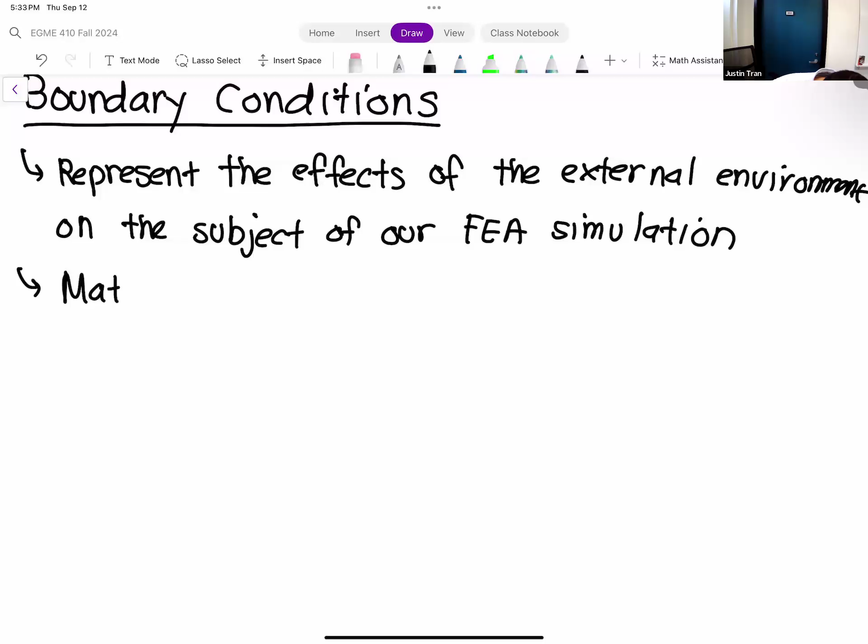Boundary conditions also play a very important mathematical role. Because if you recall, FEA, or finite elements in general, is just a very sophisticated computational way of solving differential equations. In order to get a complete solution to a differential equation, you need to apply boundary conditions on what we call the general solution.

And this is not a new occurrence—you've already used boundary conditions in your previous math classes in 308. So let's do a very quick example to remind you what this looks like. Let's consider a very simple 1D differential equation.

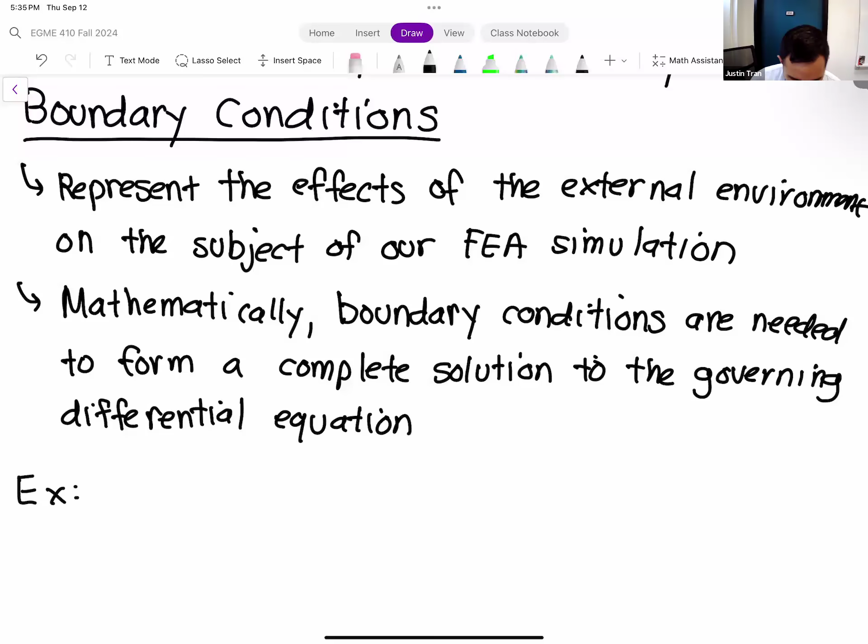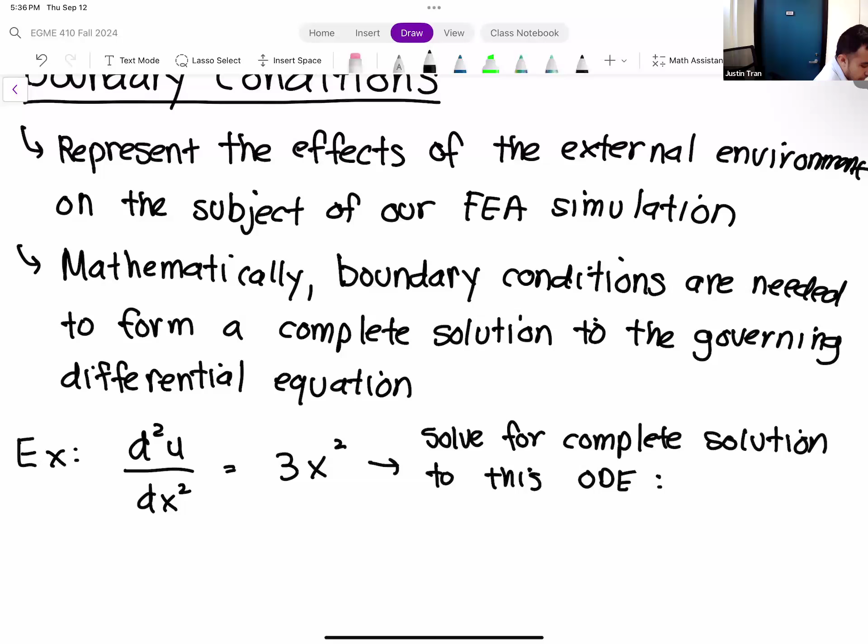Let's consider the differential equation d squared u / dx squared equals 3x squared. We're interested in solving for the complete solution to this differential equation. But of course, to get a complete solution, we need to subject it to certain boundary conditions. The first boundary condition is that u of 0 is equal to 18. The second is du/dx evaluated at x equals 10 is equal to -5.

So those two conditions right there are boundary conditions. You're going to see that we're not going to be able to completely solve this problem without using those boundary conditions. So let's go ahead and solve this first—let's work on the governing equation. I chose this differential equation very intentionally, just because we can solve it by straight up integrating.

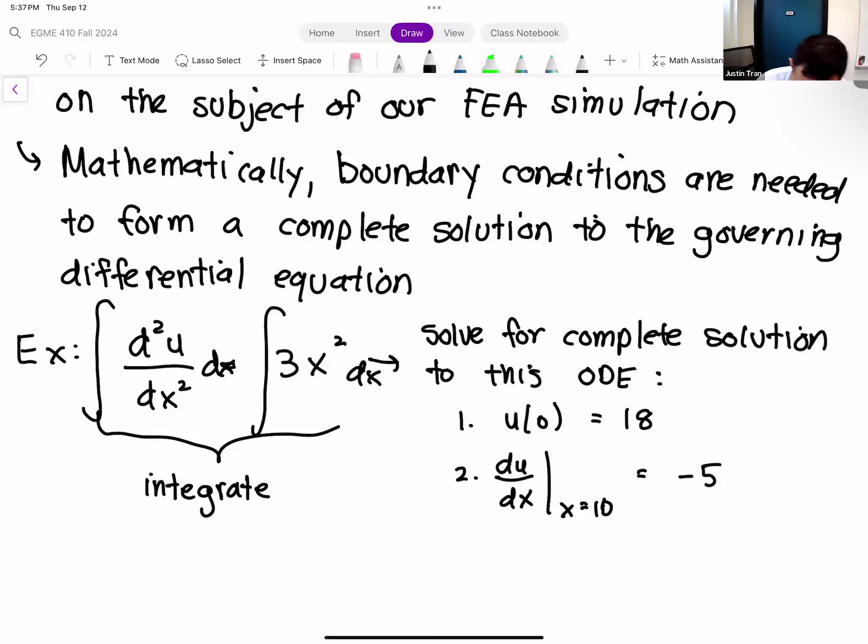We're going to take the integral of both sides with respect to x. On the left-hand side, we have a second order derivative, and the integral lowers that order by 1, giving us du/dx. On the right-hand side, we have the integral of 3x squared, which is simply x cubed. But because we're doing indefinite integrals, we don't have any integration bounds, so this integration is only valid up to an arbitrary constant. We need to make sure we add that—we'll call that arbitrary constant C1.

We integrate this one more time, we get on the left-hand side that integral is going to cancel out that derivative, without the dx, since we're taking the derivative with respect to x. So on the left-hand side we have u of x. On the right-hand side we have the integral of x cubed plus c1. The integral of x cubed is 1/4 x to the 4th. We have the integral of a constant c1, so the integral of c1 is just c1 times x.

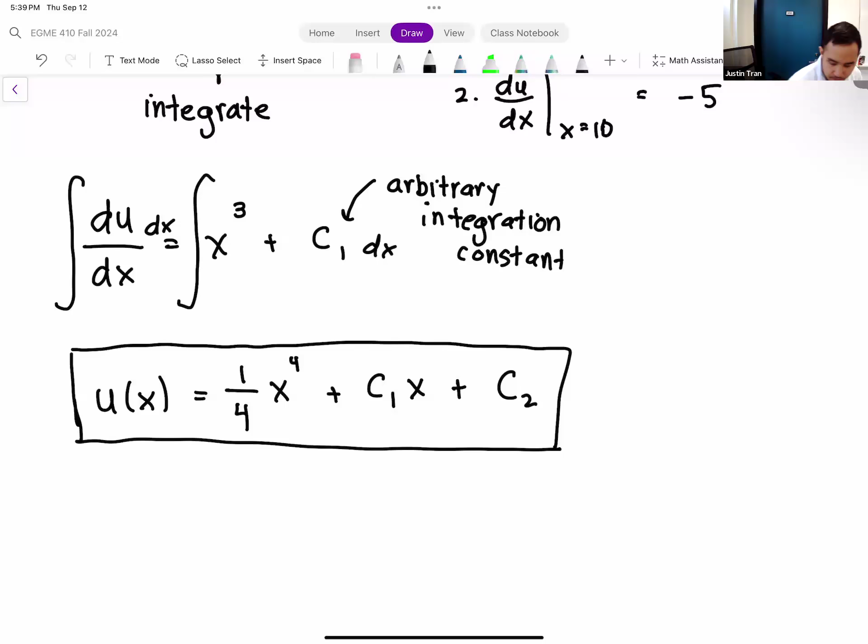So what we have right here, this is our general solution. It's a solution to our differential equation, but it's only valid up to these arbitrary constants. We're not going to have the full solution until we specify values for C1 and C2.

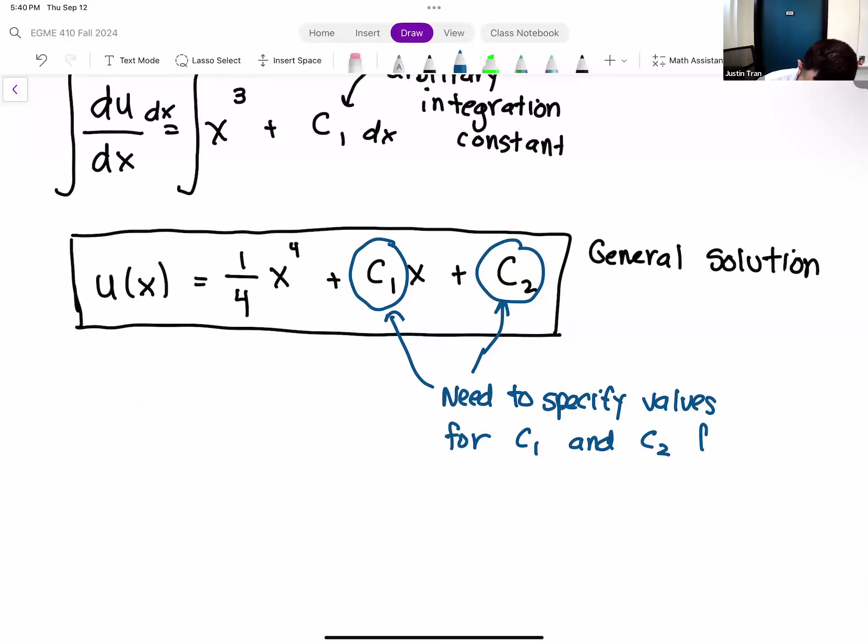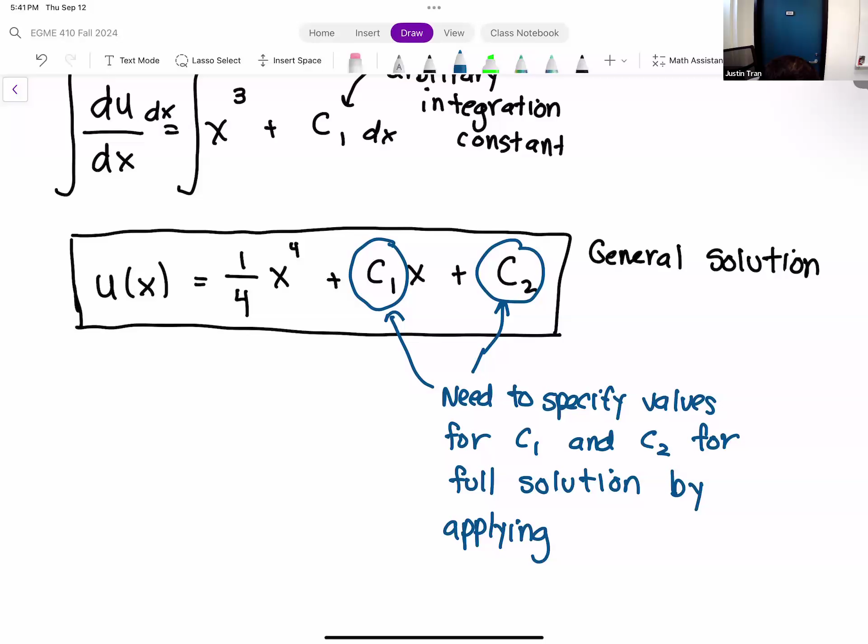Any questions on how we got to this point here? And so of course, the way that we're going to specify these values is we're going to apply the boundary conditions. Our boundary conditions are going to give us basically two mathematical equations that we're going to use to solve for these two unknown constants.

Let me write down our boundary conditions again. Boundary condition 1 was u of 0 equal to 18. Our second boundary condition is du dx evaluated at x equal to 10, is equal to -5.

Before we start plugging these in, let's look at the boundary conditions and see what they represent mathematically. Let's start with the first boundary condition and describe what it's specifying with words. What this boundary condition is saying is that the value of the solution, or the value of u, when x is equal to 0, has to equal 18.

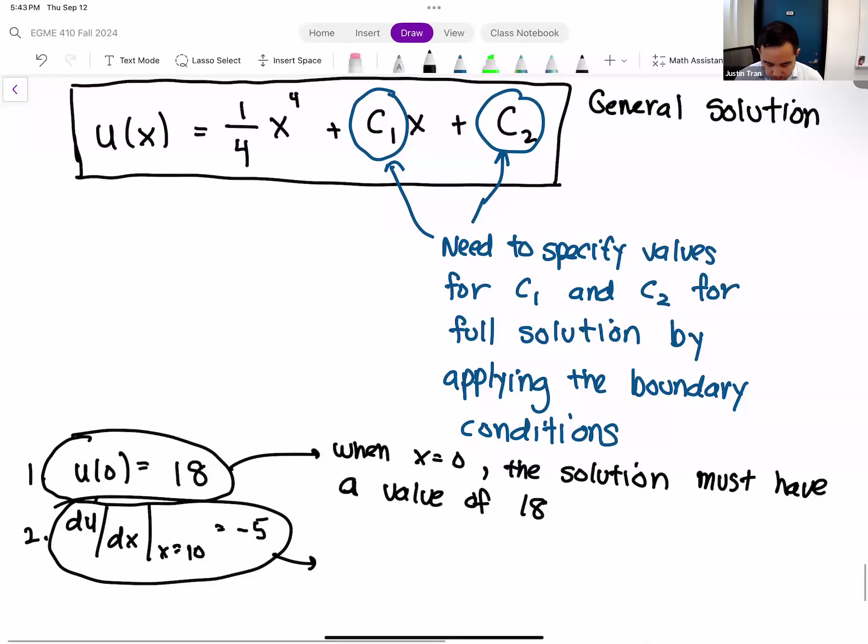And then by that same token, we can write a sentence to describe the second boundary condition as well. This boundary condition basically says that at x is equal to 10 -- it's small semantics, but technically saying 'at' is more accurate than 'when,' because x is a physical coordinate in this case, but it means the same thing -- at x is equal to 10, the derivative of the solution, since this boundary condition is a condition on du dx, that's the derivative of the solution.

At x equal to 10, the derivative of the solution must be -5.

So the reason I wrote those down -- you look at the equation and it's obvious that that's what those equations mean, right? But let's go back to our physical definition of the boundary conditions.

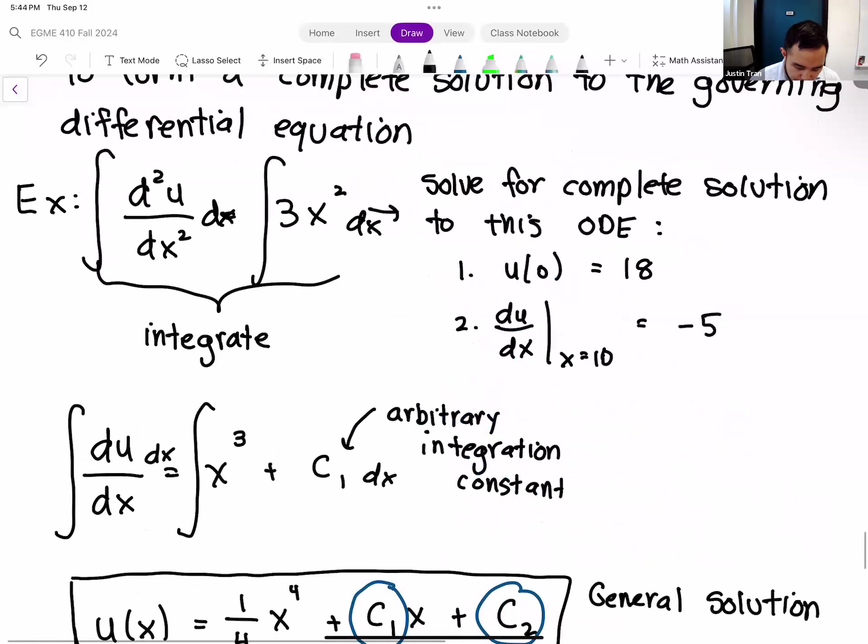So we come back up to the top here, rewinding to what we said a bit ago: boundary conditions represent the effects of the external environment on the subject of our solution, or on the subject of our FEA simulation.

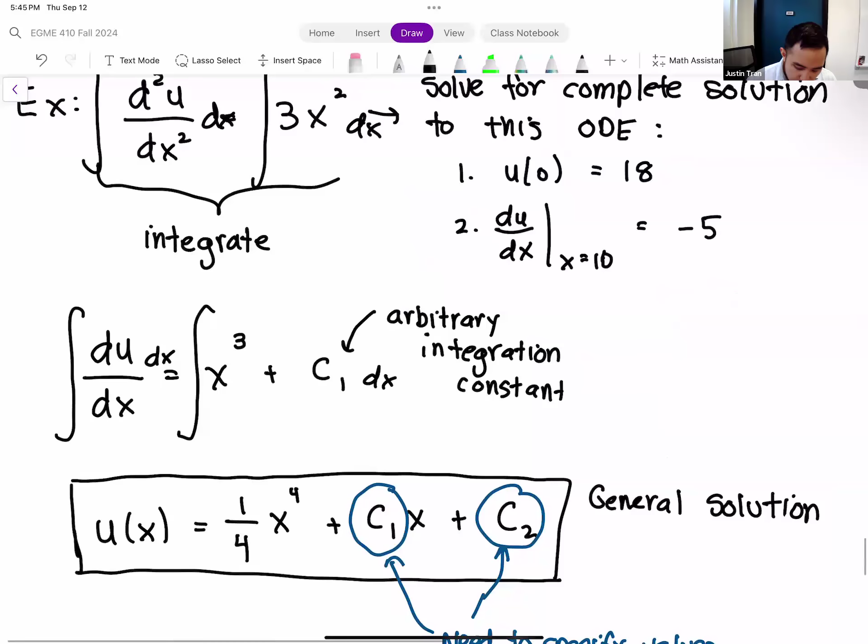If we define x equal to 0 as the left bound of the domain, and we assume that x equal to 10 is the right bound of the domain...

...what these boundary conditions are specifying is the behavior of the solution at the exteriors, or at the ends, of the domain.

Through this you can see the connection between the physical interpretation of the boundary conditions and the mathematical interpretation. They're one and the same, just two different ways to describe it.

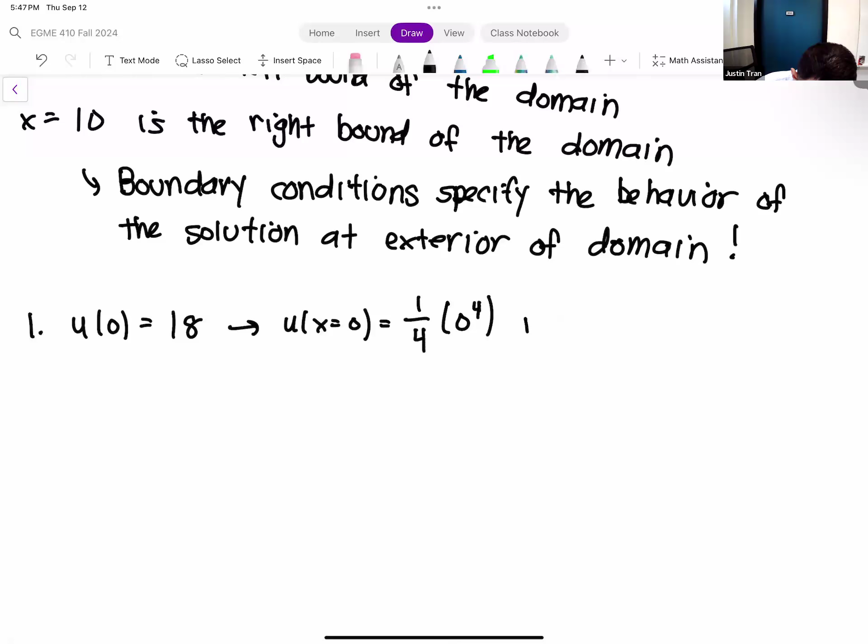Let's take our general solution here and plug in x is equal to 0. We have 1/4 times 0 raised to the 4th power, plus c1 times 0, plus c2, is equal to 18.

All right, so in this case we have a simple case, and two of the terms here are just going to drop out because we're multiplying by 0. So we have 1/4 times 0 raised to the 4th power, that's just going to go away. And then we have c1 multiplied by 0, that's also going to go away. And then all we're left with is c2 is equal to 18.

So straight away from applying that first boundary condition, we get the value of one of our parameters, or one of our constants, very easily.

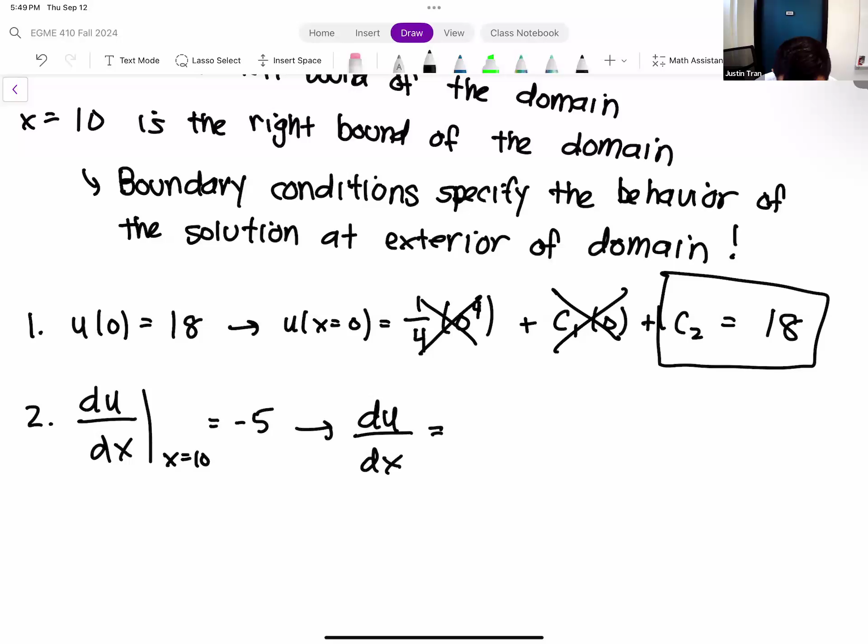Okay, and then our other boundary condition states that du dx evaluated at x equal to 10 is equal to -5. Let's remind ourselves what du dx is again: du dx is equal to x cubed plus c1.

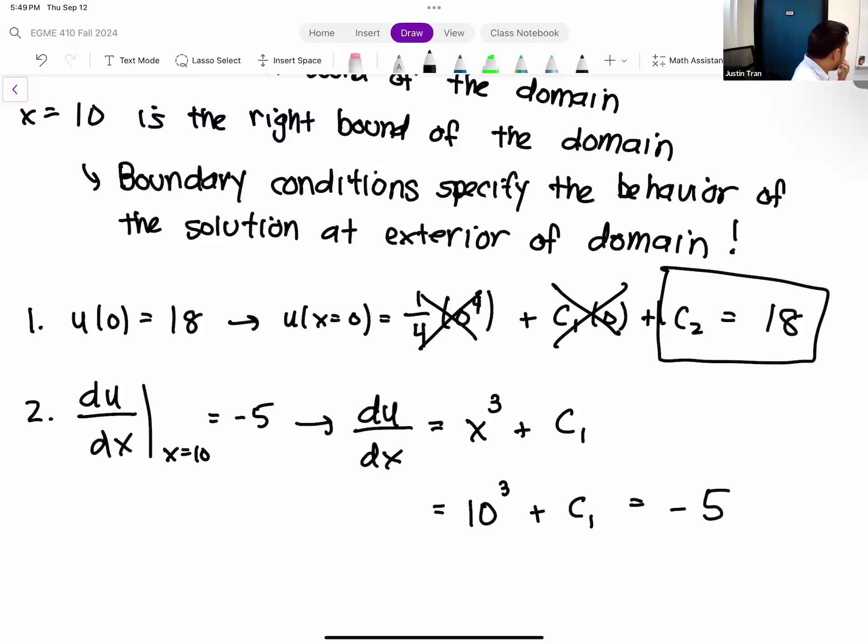All right, so if we evaluate this at x is equal to 10, we plug in x equal to 10 here: 10 cubed plus c1, that's going to be equal to -5, okay? So let's evaluate 10 cubed, which is 10 times 10 times 10, that's 1,000.

Plus c1, equal to -5. We can solve this equation for c1: c1 equal to minus 1,005.

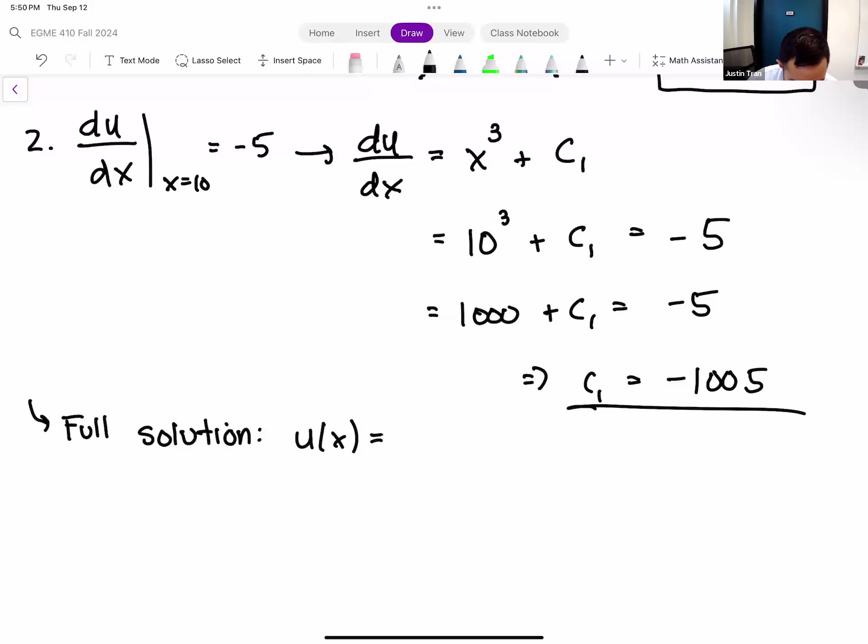So now that we have the values of both of our constants, we can form our full solution. Our full solution in this case, u of x, is equal to 1/4 x to the fourth minus 1,005 x plus 18.

All right, any questions on this example here? All right, so that's it. That example is just to illustrate to you the purpose of boundary conditions. We're not going to be solving differential equations in this class, it was just kind of a refresher. Hopefully this all seems familiar to you, just to draw the connection between what we're doing in ANSYS and what's happening mathematically.

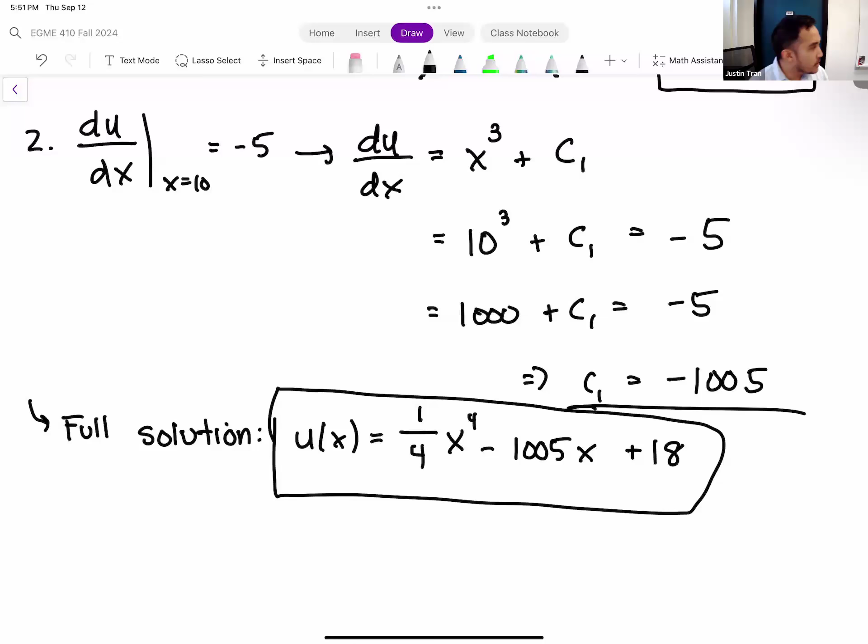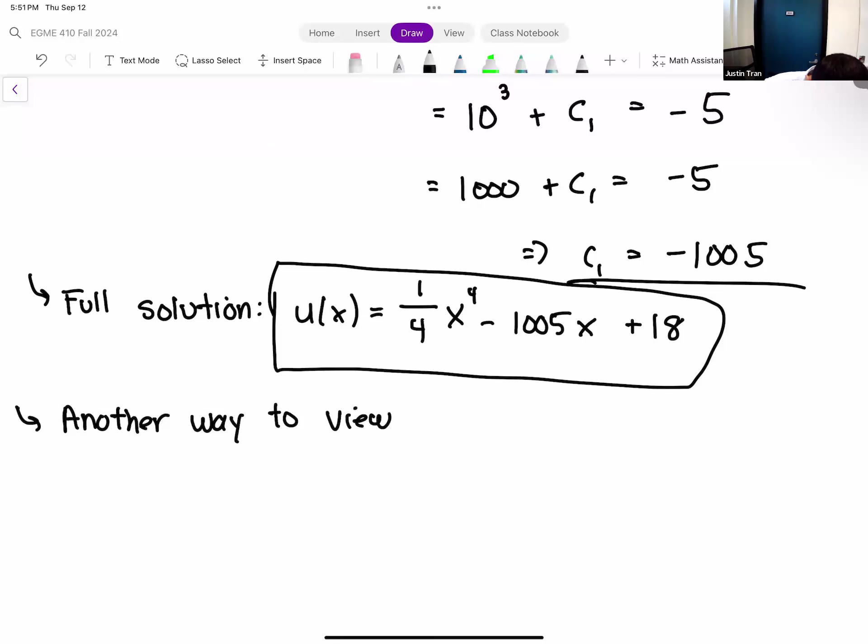Okay, so another way to look at the boundary conditions is to think of them as kind of the active agents. Or another way, the way that I like to think of it, is that the boundary conditions are kind of the input into your FEA simulations.

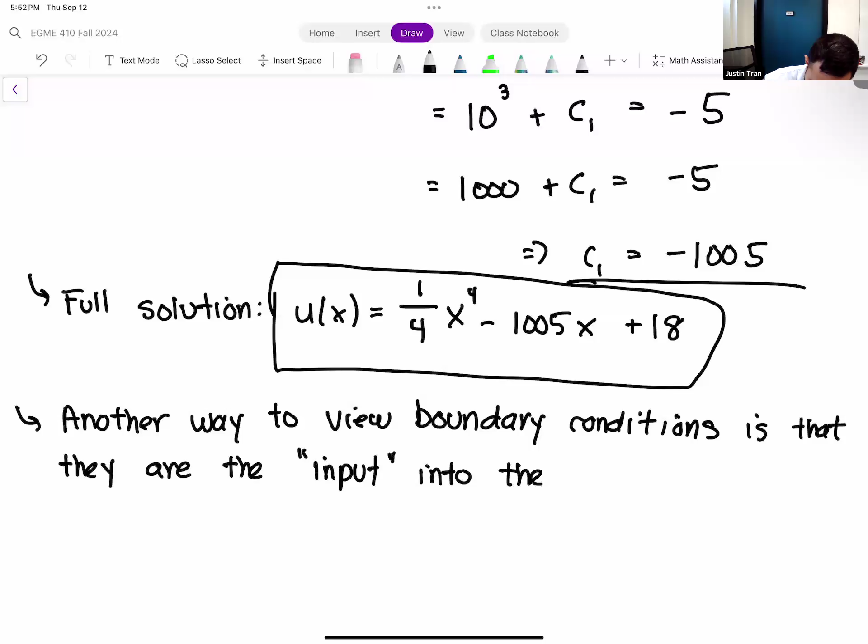That might be kind of a strange way to think about it because technically there are a lot of inputs into the FEA simulation. You have your CAD model, you have mesh settings, so all of those are technically inputs. But when you think about the FEA simulation as strictly just a boundary value problem, then the boundary conditions become the input to that problem, and they cause a reaction, a response from your domain, from your subject.

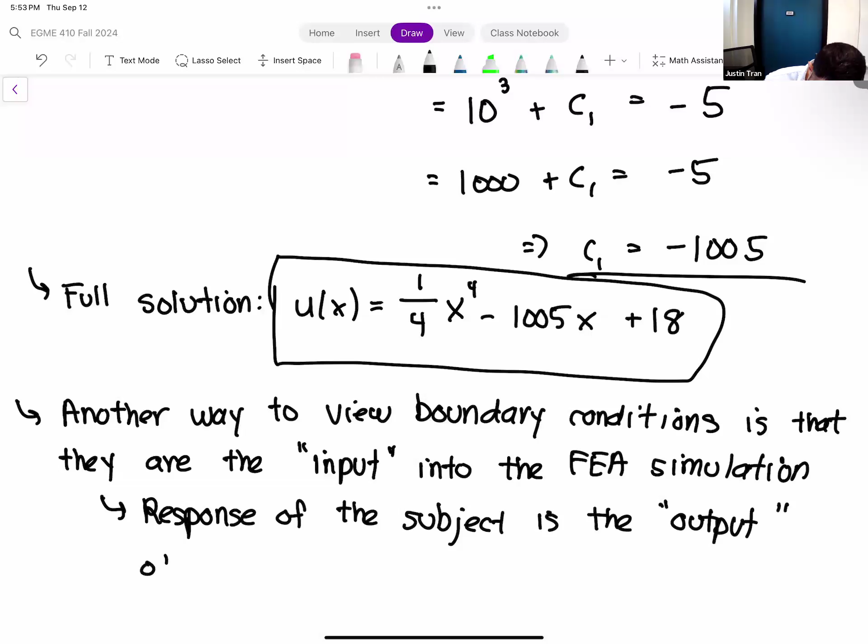I think I've mentioned this before, when we were going over boundary value problems earlier in the semester, but I wanted to mention it again because you'll hear that terminology used, mostly by old timers, people who've been doing FEA for a long time, or applied mathematicians. It's not uncommon that you might be working together with those people in the professional world, so some people might use this terminology, and I just want to make sure you're aware.

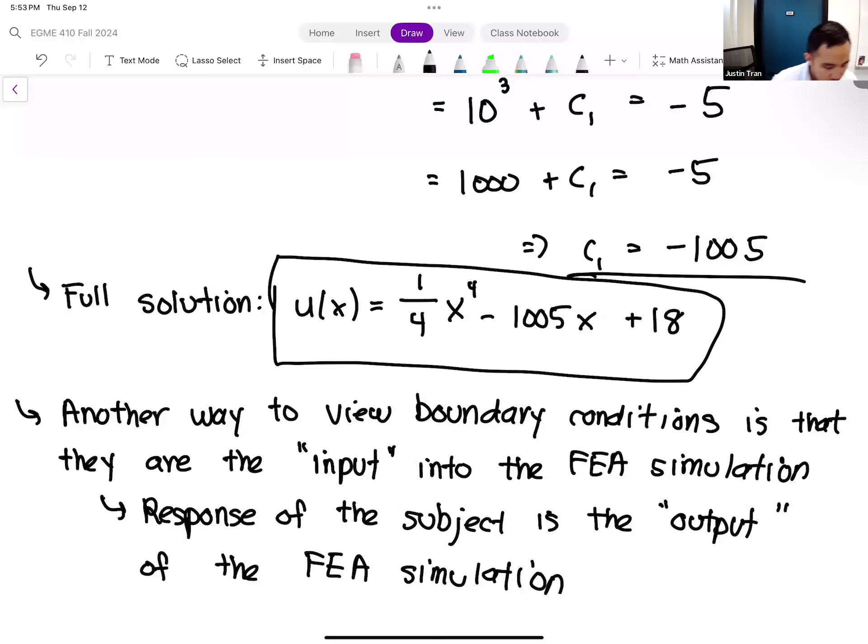Okay, so the next thing I want to talk about is the different kinds of boundary conditions that there are and the types of effects they have on our solution. For our purposes, we're going to focus on kind of a two-class specification here, so we're going to talk about two different types of boundary conditions.

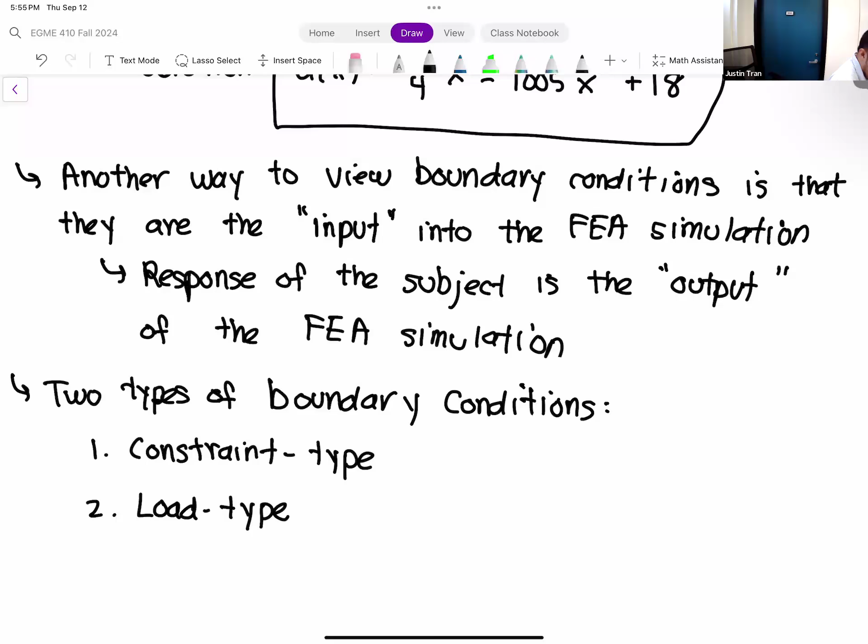Okay, so the first type of boundary condition is what I call constraint type, that's what we're going to talk about first. And then the second type of boundary condition is a load type. Mathematically they have their differences in terms of how they affect the solution, but also it's an important distinction because ANSYS treats them a bit differently as well. All right, any questions on anything so far? Okay good, all right, so let's look at constraint type boundary conditions first.

Another name for these types of boundary conditions is that these are often called Dirichlet boundary conditions. That's kind of the traditional name for them, and that's honestly how I learned it when I was in school. Dirichlet is the name of some long dead mathematician, and mathematically these boundary conditions are credited to him. But I like to call them constraint type boundary conditions because it's more descriptive in terms of how they affect our solution.

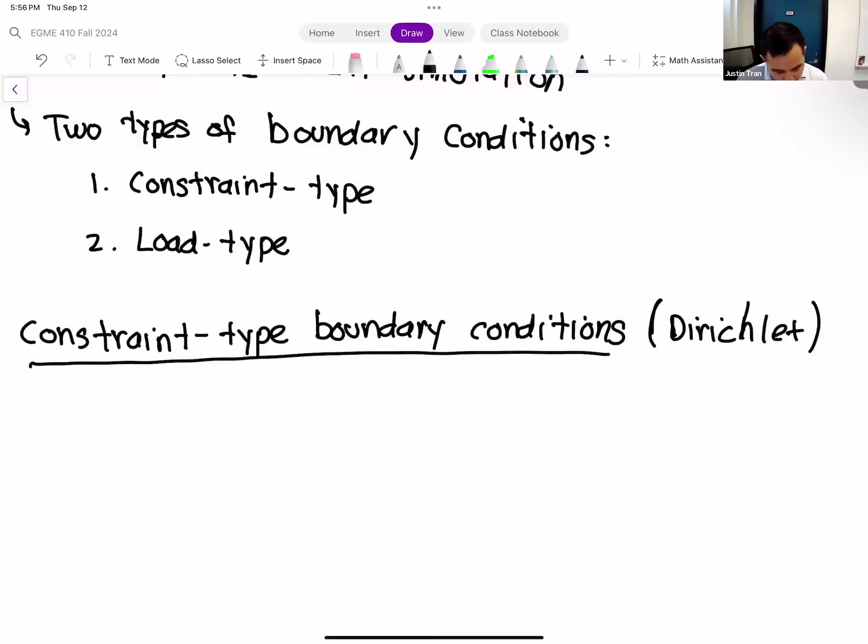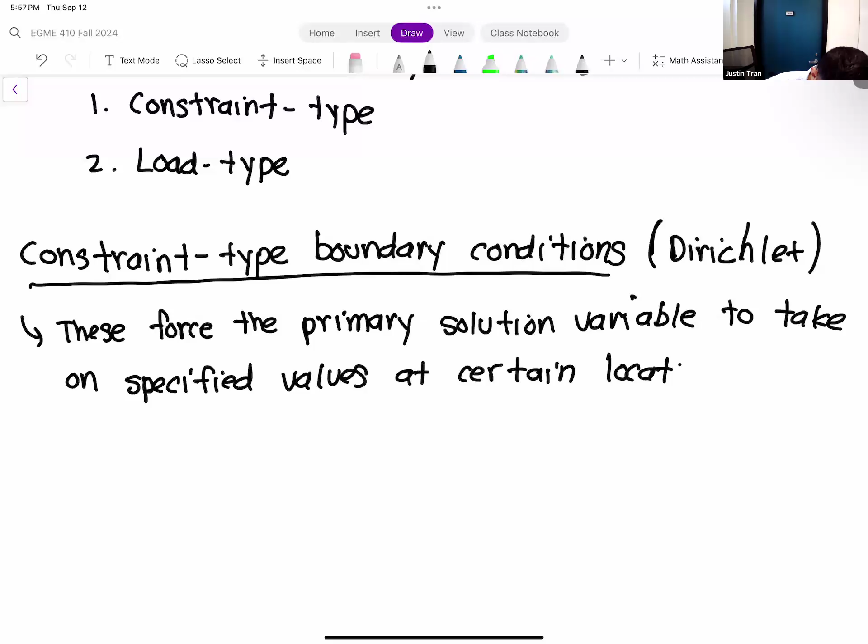Okay, so constraint type boundary conditions, the reason I give them that name is because they force the solution to have a specified value at certain locations in your simulation. Another way that you can think about it is that you're constraining the solution to have a certain value when you apply a constraint type. The key word here is that we're constraining the value of the primary solution variable.

Remember, we talked about how in every type of physics that's allowed in ANSYS, there is a primary solution variable that is solved first, right? So that's the direct solution to the differential equation. And a constraint type boundary condition is mostly concerned with the values of that primary solution variable. In structures, the primary solution variable is technically displacement, but the way that we kind of think about it is deformation.

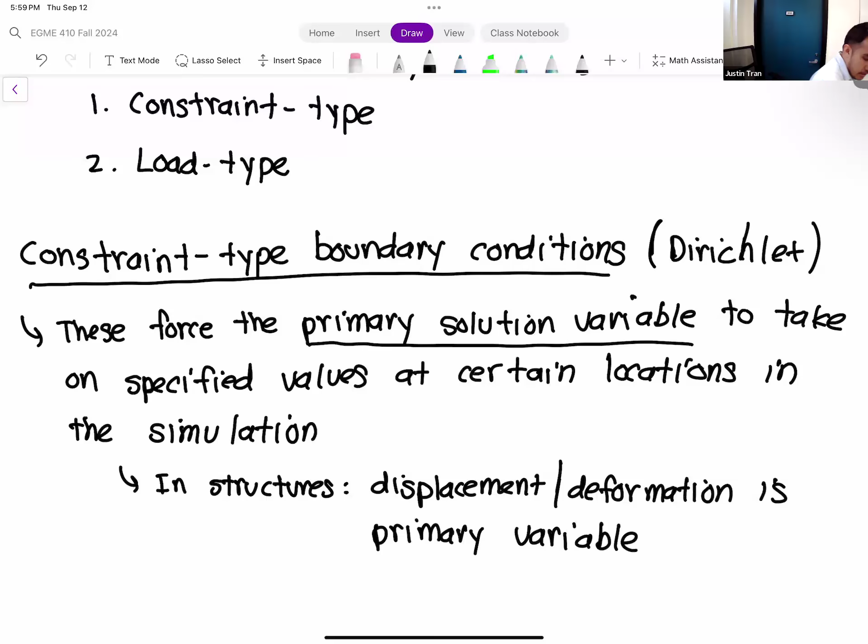So let's look back at the example that we did earlier today, and let's see which of our boundary conditions is the constraint type boundary condition. If we look at our example earlier, the first thing that we have to ask ourselves is what is the primary solution variable? What's the first thing that we compute from our solution?

And so in our earlier example, our primary solution variable was u of x, okay, or just to say more simply, just u. That's the first thing that kind of pops out of our solution. We plug in values of x, that's the first thing that we can compute. And so that means that whatever boundary condition directly specifies the value of u, that's going to be a constraint type boundary condition.

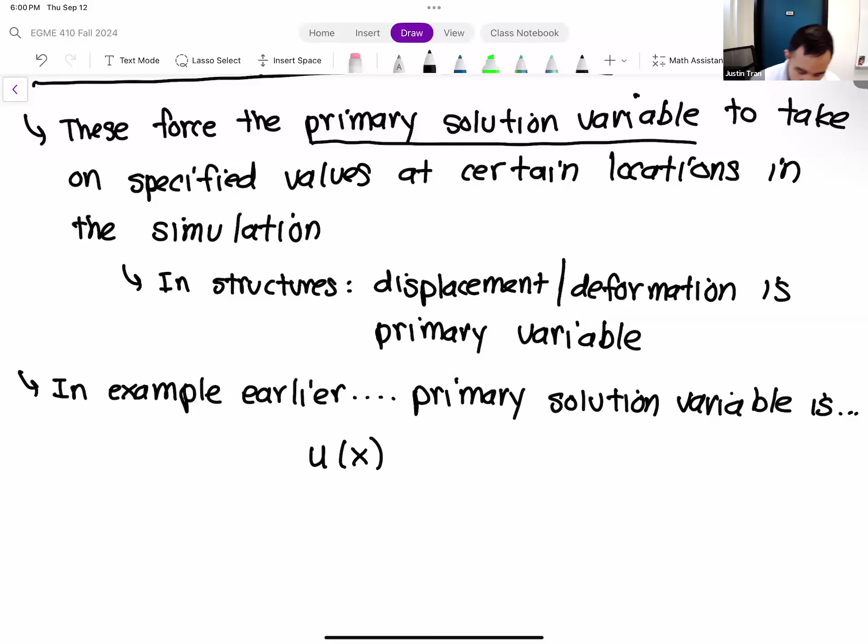And so if we look at our boundary conditions, if we look at the first boundary condition that we had, u of 0 is equal to 18. So if you look at this boundary condition here, what we're saying is that when x is equal to 0, or at x is equal to 0, our solution has to take a certain value. This forces the solution to take a value of 18 at x is equal to 0.

And so that basically fits our description of a constraint type boundary condition, right? First of all, it acts on the primary solution variable, which is u, and second of all, it directly specifies its value. So this u of 0 is equal to 18 is kind of a classic example of a constraint type boundary condition.

So what does a constraint type boundary condition look like in ANSYS? We've already used one. We used one in activity 1. In fact, it's probably the most common constraint type boundary condition that you're going to use in this class. And so the constraint type boundary condition that we had in our first ANSYS activity was a fixed support.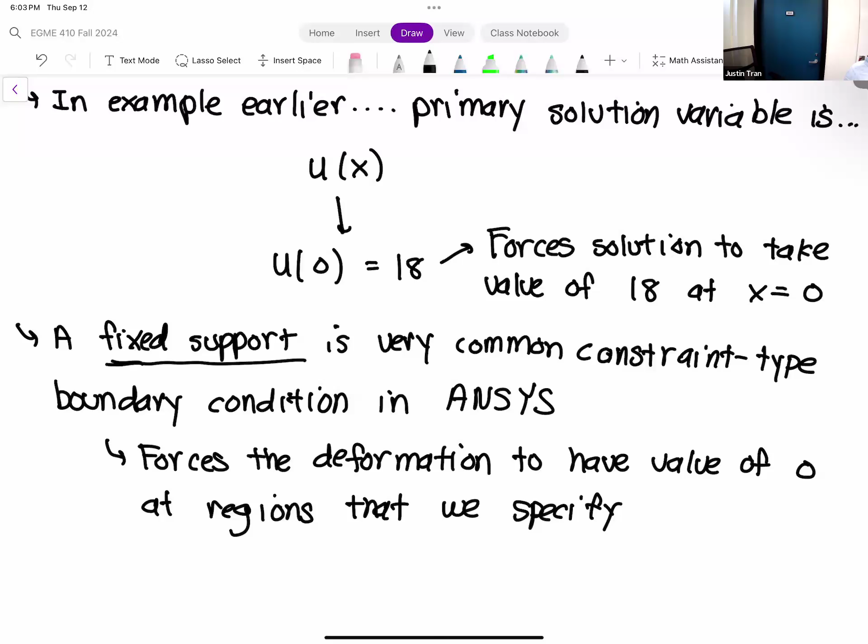Practically, in every structural simulation, you need to have at least one fixed support somewhere in the model. You can do it without a fixed support if you specify displacement boundary conditions, which we'll talk about soon. But the reason you want to add a fixed support is that it prevents any rigid body motion or rigid body translation. So the easiest way to do that is to apply a fixed support. Thank you.

So for most of the time, when you're running ANSYS on the activities or projects, the first thing you should ask yourself when applying boundary conditions is: where is my fixed support? Where does it make the most sense to apply a fixed support? Because without a fixed support, you could have some crazy things happen.

Let's say you have a simple beam. Normally for a beam, you have a pin support or some kind of fixed support. But let's say this beam is not adequately constrained, and on both ends we have roller supports. A roller support constrains the beam in one direction, preventing it from displacing up and down at the ends, but provides no constraint in the horizontal direction. So if we apply a force, like a load, there's nothing preventing the beam from just rolling down the street. Instead of a beam, you just have a skateboard in this case.

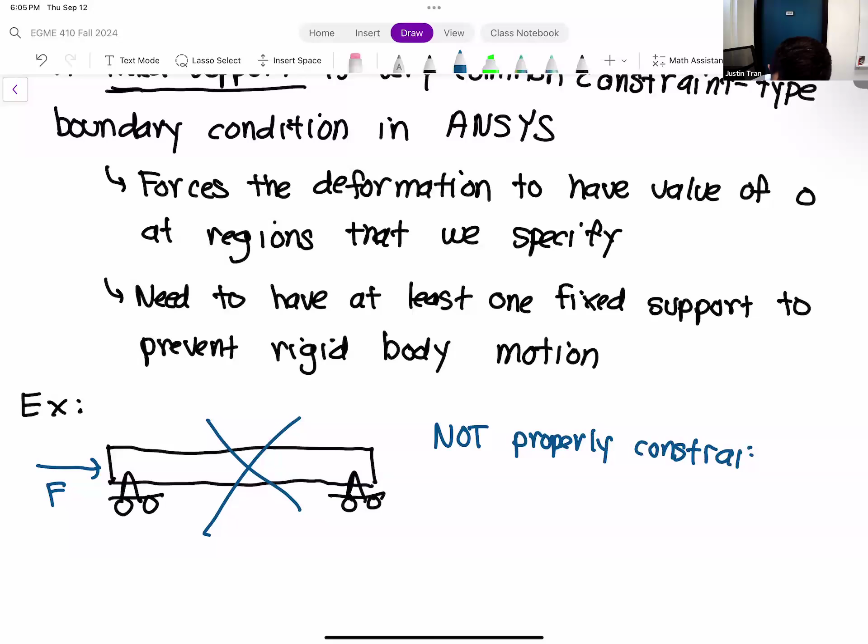And so you need to have at least one, for the most or 99% of the time it's going to be a fixed support. You need to have a fixed support somewhere in your model, otherwise you're going to have rigid body motion.

The good news is that ANSYS is actually relatively smart. If ANSYS detects ahead of time that your model is not adequately constrained, you're either going to have a very large degree of motion, or if there's going to be any rigid body translation, ANSYS will actually warn you. It will give you a warning and say, hey, this model is not adequately constrained, large deformations may occur. So if you haven't adequately constrained your model, that can be a problem.

And that's particularly useful once you start getting into assemblies of parts. Once we do activity 4, which is about shell and beam elements, a big part of it is actually taking a huge assembly of parts and properly fixing them to each other. If you don't do that properly, ANSYS will give you a warning. This is really important to know: ANSYS will naturally look for any kind of fixed support or displacement support in your model before it allows you to run a simulation.

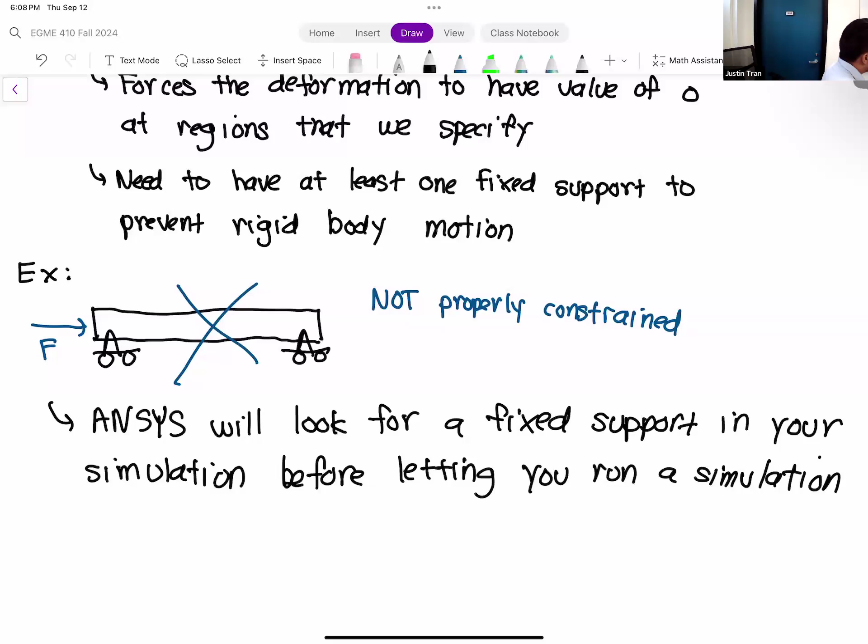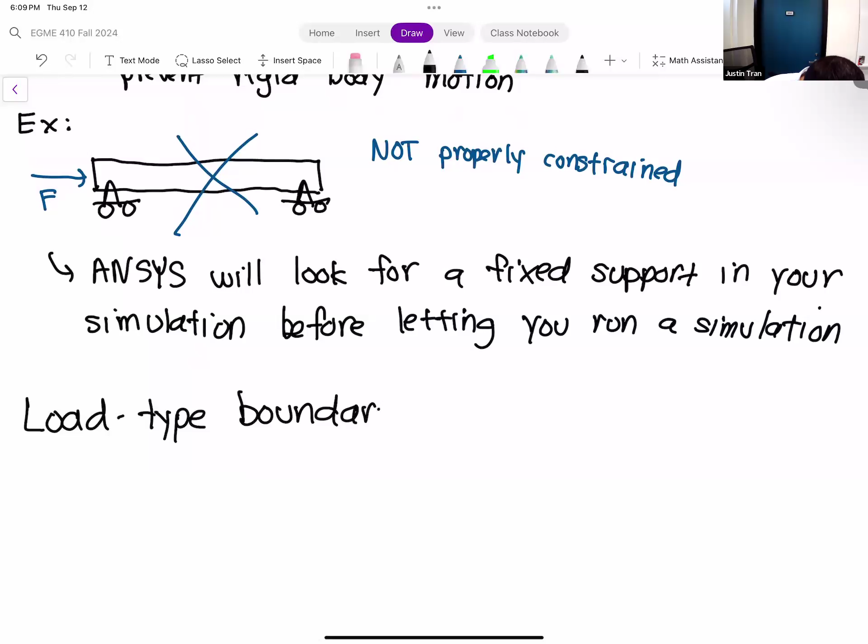So the next type of boundary condition we're going to talk about is load type boundary conditions. While constraint type boundary conditions directly specify the values of the solution, the way load type boundary conditions work is that eventually they specify the values of the primary solution variable, it just does so in an indirect way. So load type boundary conditions are basically every other type of boundary condition out there that has an indirect effect on the primary solution variable.

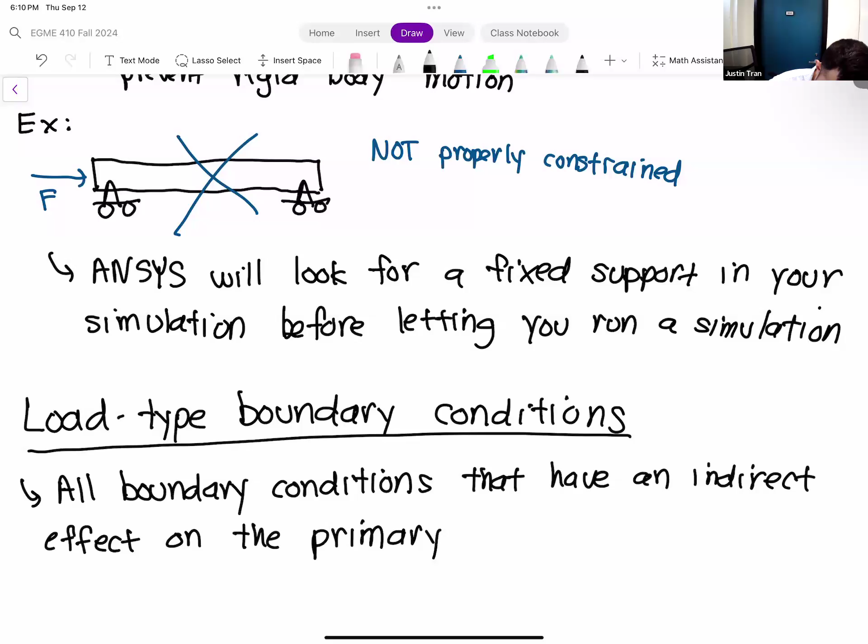Of course, I'm using the term indirect a little bit loosely. By indirect, what I mean is it's kind of the opposite of the constraint type boundary conditions, where the constraint type is very simple. When you have a constraint type boundary condition, you know exactly what the primary solution variable is going to be at that location. So if you have a fixed support, you know the deformation is going to be zero. Usually by indirect boundary condition, what I mean is that in order to predict the effect on our primary solution variable, we have to solve additional equations. A lot of times it requires a solution of governing equations to find the real effect.

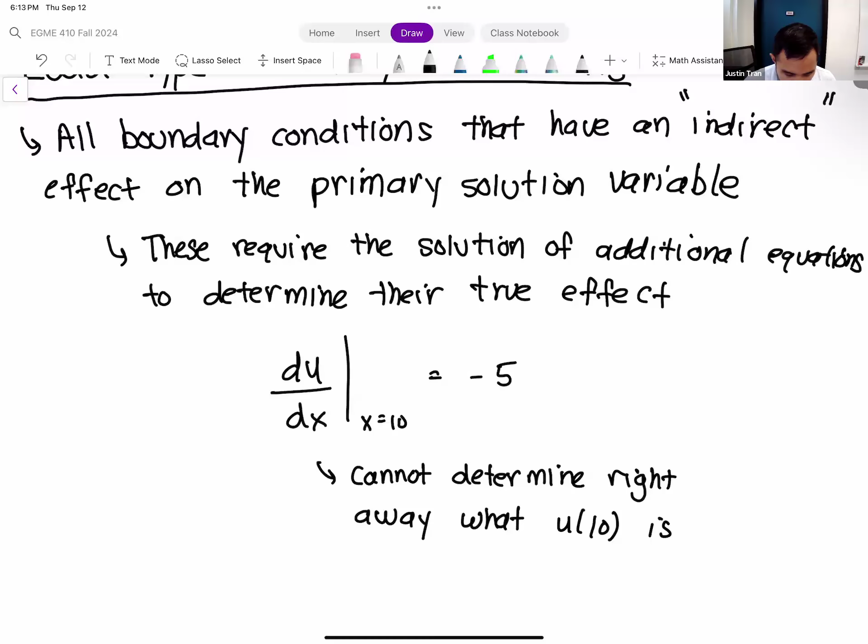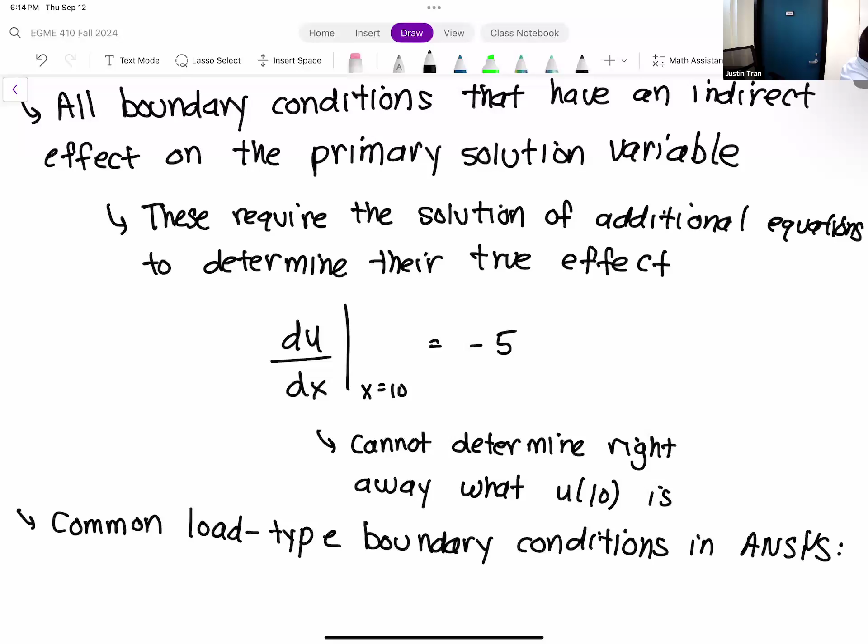So load type boundary conditions are very plentiful. The majority of boundary conditions that you're going to find in ANSYS kind of belong to this load type. The ones we're going to use the most in ANSYS are probably force boundary conditions and pressure boundary conditions.

Another thing that you can specify, a little bit more uncommon but also important, is you can directly specify a stress type boundary condition. Maybe you're simulating a situation where you have shearing stress applied to your model - that's probably the most common case. So you can apply that shearing stress as a stress type boundary condition.

All of these kind of fall under the umbrella of a load type boundary condition, because these boundary conditions are going to have an effect on the deformation of your model. You apply a force to a structure, it's going to deform in a certain way. It does so in kind of an indirect manner - you have to solve the equations first before you find out what the solution variable is. So strictly speaking, even though load type boundary conditions are very common, and in fact we're going to use them a lot, they're not a requirement on an FEA simulation the way that constraint type boundary conditions are.

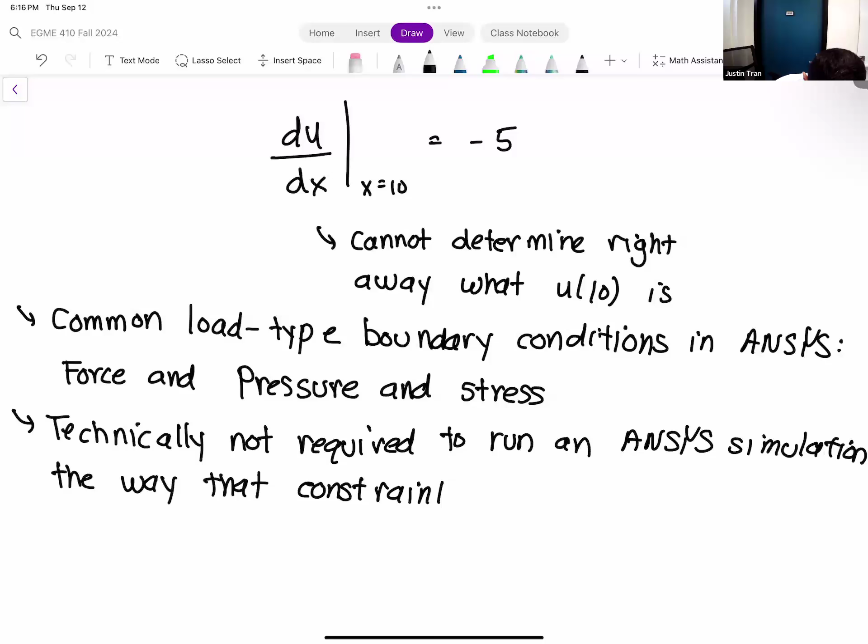So while you can't run a simulation without a constraint type boundary condition, it is possible to run a simulation without a load type. One way that you can do it is by specifying a displacement type boundary condition.

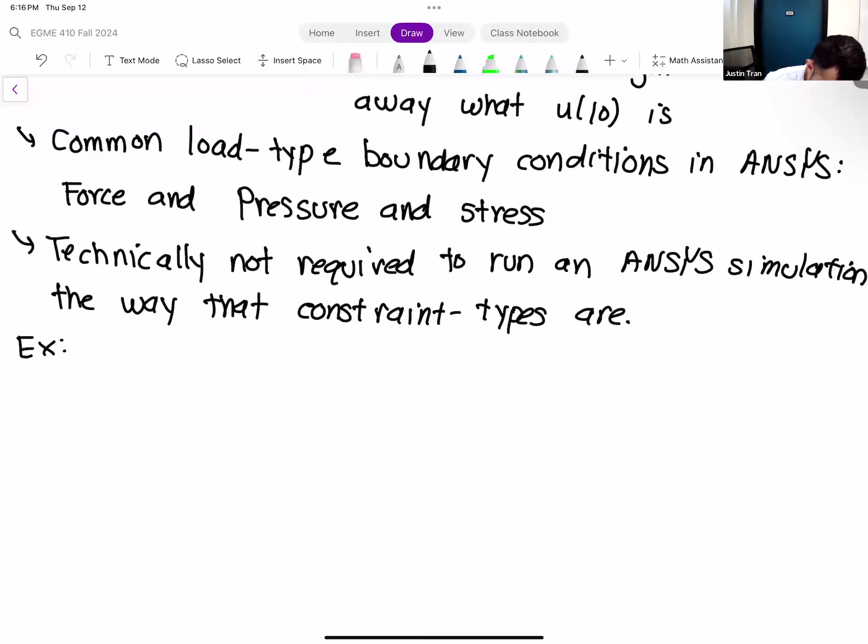So if we look back at our example, let's change the second boundary condition to another constraint type boundary condition. Instead of du dx at x equal to 10 being negative 5, let's change it. So if we change it to another constraint type boundary condition, what we're saying is that we're going to directly specify the value of u at x equal to 10. So instead we say u of 10 is equal to, let's say it's equal to 100.

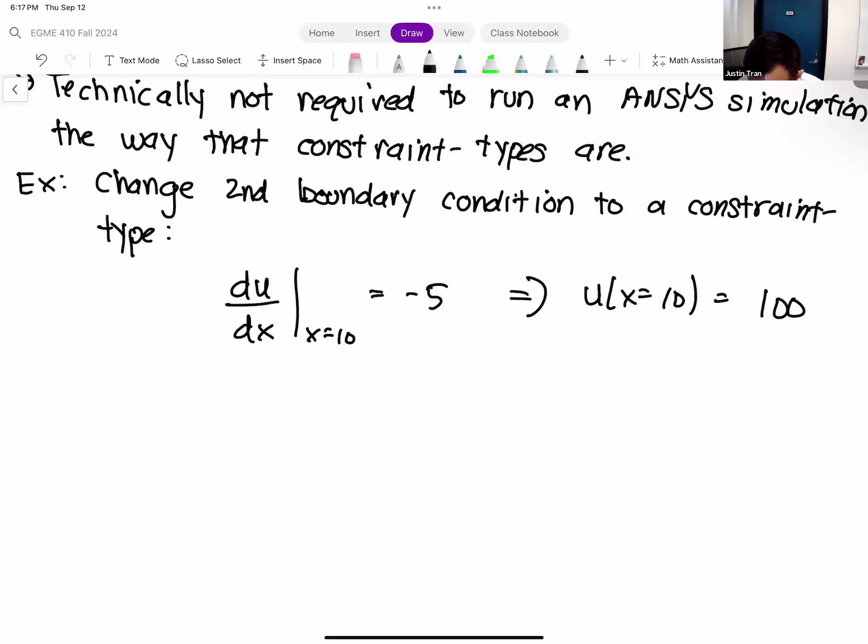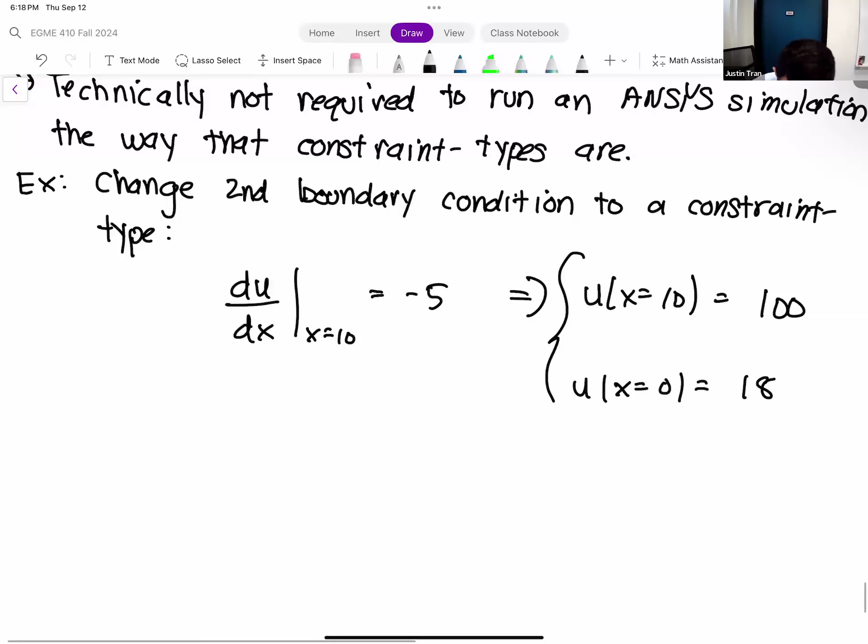You can take this boundary condition along with the original constraint type - you can take these two boundary conditions and get a valid, full solution for this.

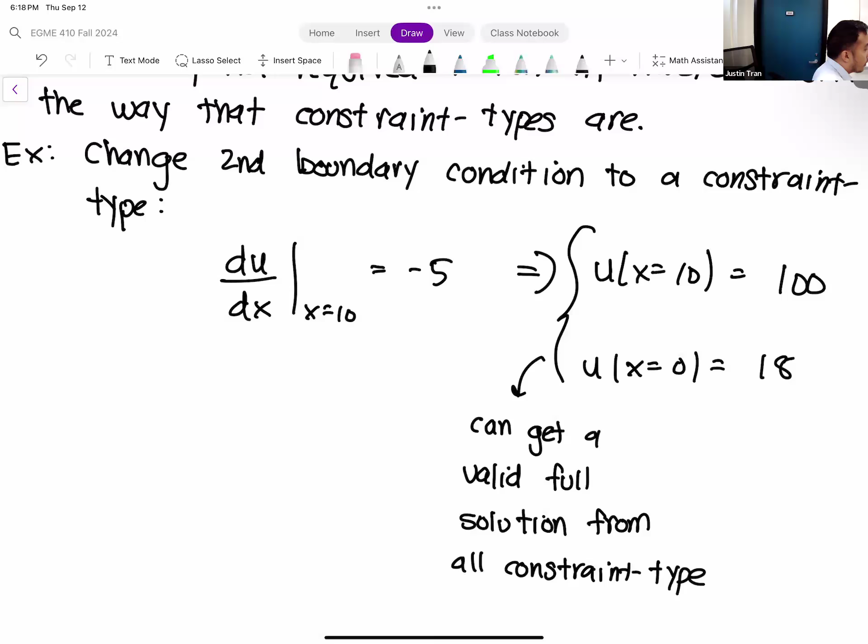Kind of the ANSYS equivalent of this is that if you specify two displacement type boundary conditions on two parts of the model. So let's say that we have our beam here, and we fix the beam on the left-hand side - so we have our fixed support, that's our constraint. And then on the other side of the beam, let's say that we're going to pull on it, and we're going to pull until it deforms by a fixed amount.

And so this X naught here - let me call it L naught instead. So let's say we're going to pull on the beam until it deforms by an amount L naught. So we have a specified deformation on the right side of the beam.

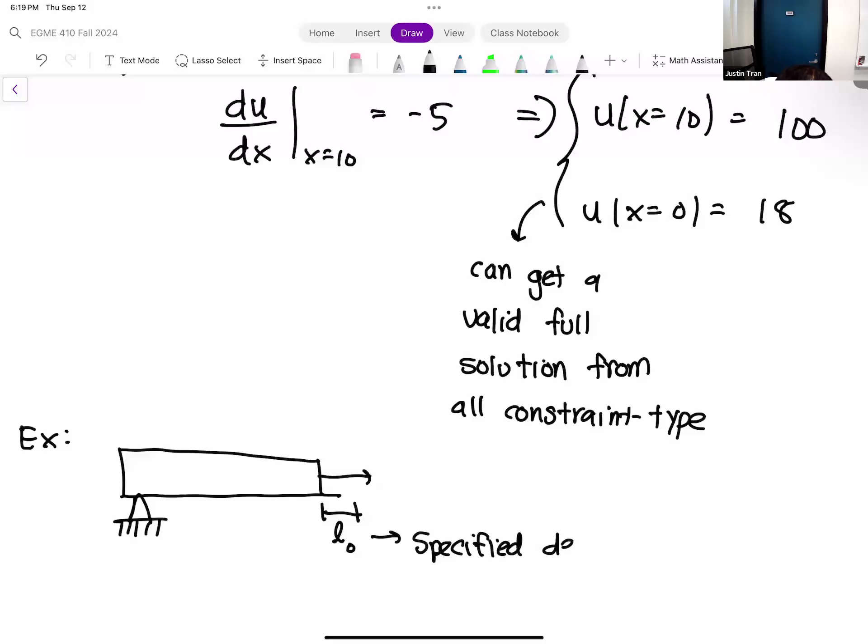You can solve this, and if you solve this in ANSYS, you're going to get a valid solution. What you'll see is that it's just going to be a linear change, going from 0 deformation on the left, changing linearly until it reaches a maximum L naught on the right. This is perfectly valid, so you can have a simulation with all constraint type boundary conditions and you'll be just fine. It may not be the most interesting simulation results in the world, though if you're in 2D or 3D it may look interesting, but you can still do this.

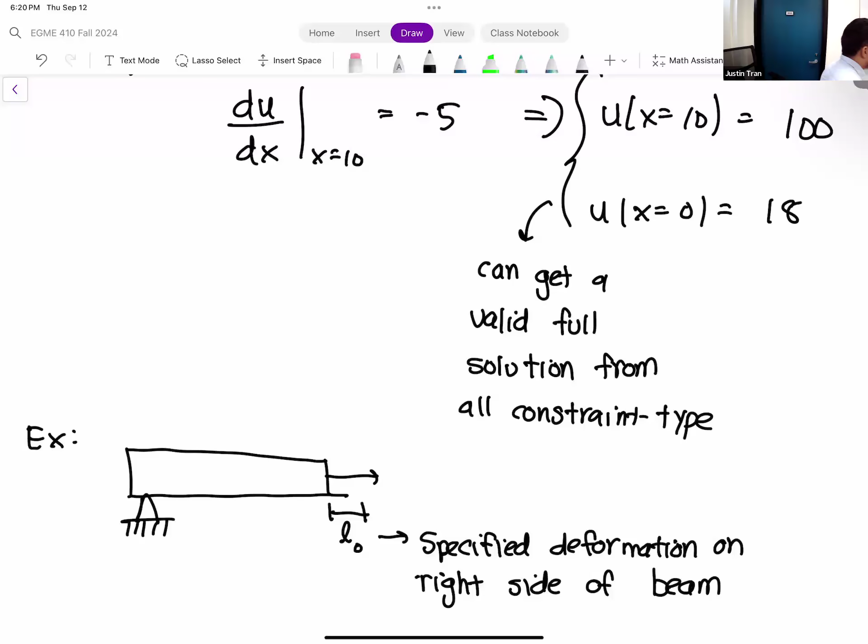What you can't do is have all load type boundary conditions.

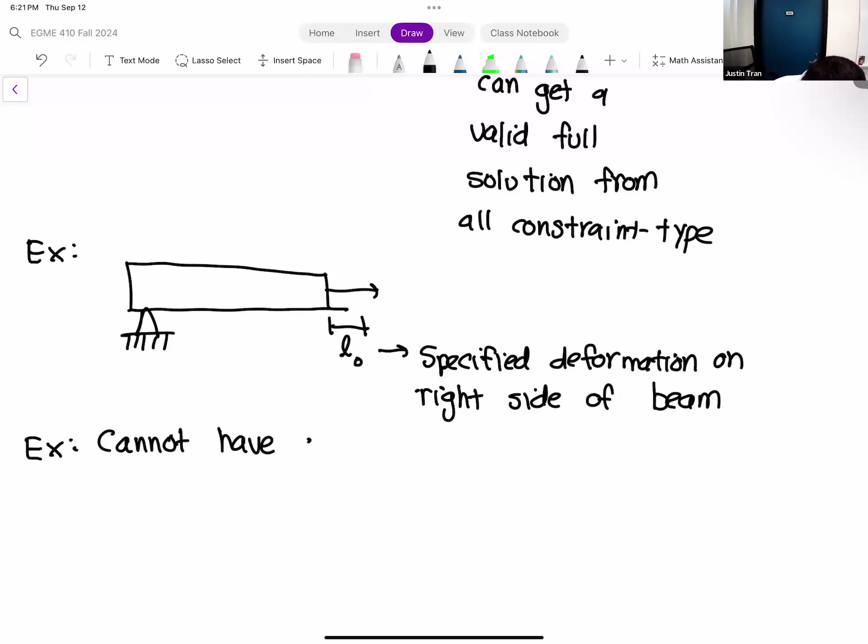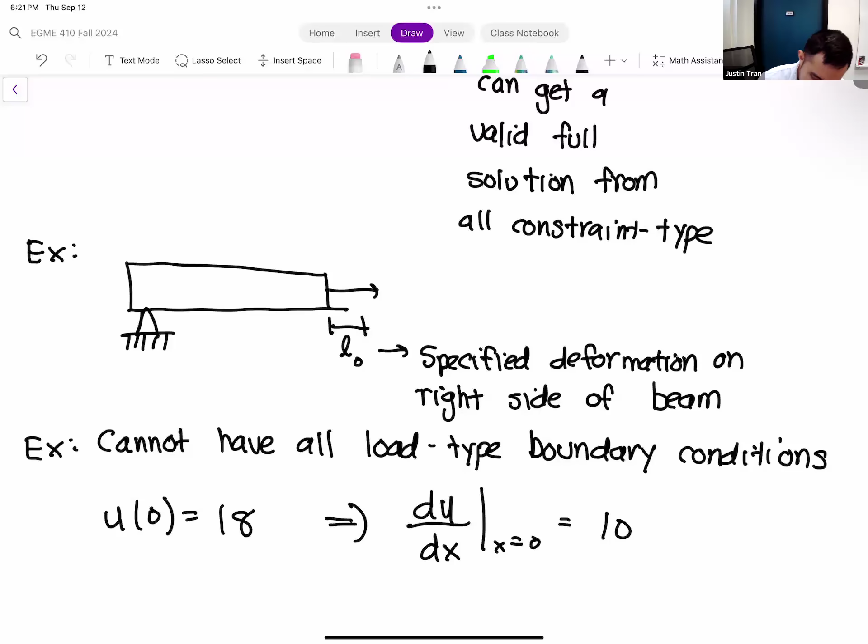Thinking back to our original example, we had our original constraint type boundary condition of u of 0 equals 18. If we were to replace this instead with du/dx at 0 equal to 10, and we have this boundary condition together with our original second boundary condition, if those were the two boundary conditions for our system, you'll find out very quickly that you're not going to be able to find a valid solution with this combination of boundary conditions.

I'm not going to go through the whole math in the interest of time, but I'll give you a sneak preview of what's going to happen. If you were to try to solve that equation with those two boundary conditions, you will be unable to specify the value of C2. Not only can you not specify the value of C2, but the value of C1 will be over-constrained as well. So you have too many equations for the amount of unknowns.

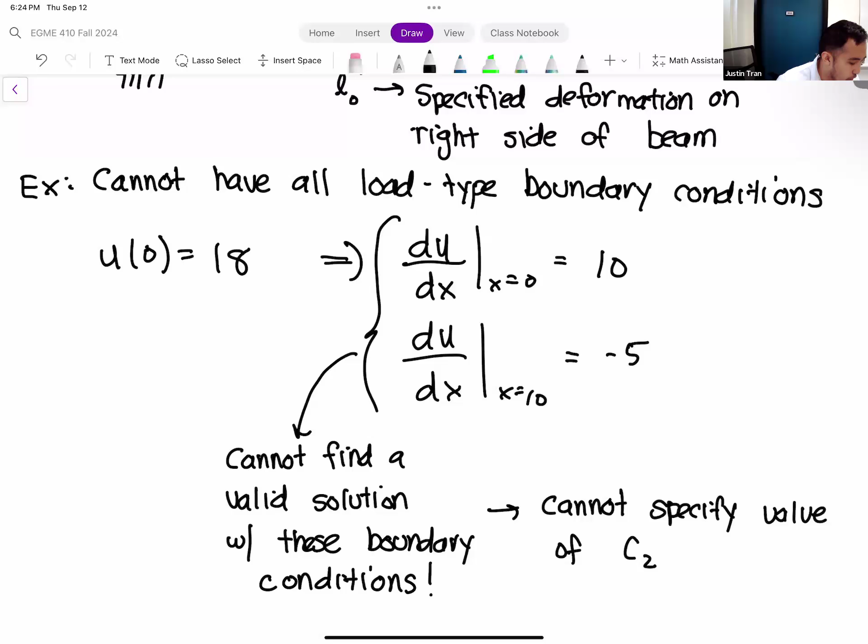Okay, so the last thing I want to talk about today is some practical considerations for boundary conditions.

For the majority of this class, you're going to take the role of a user of ANSYS, so you're not really going to be thinking about the mathematics behind the equations of the boundary conditions—you just want to apply them to your model. Taking what we talked about today, plus some other practical tips, let's list some guidelines here. The bottom line is that boundary conditions are a really important part of your finite element simulation. I'll say that about every aspect we talk about: meshing, boundary conditions, material properties, the geometry itself—all of these are extremely important, and you can't really have a valid finite element simulation unless they're all working together. So let's talk about why boundary conditions are important.

The most important consideration, the most important thing you need to think about when applying boundary conditions, is that you need to make sure the boundary conditions are physically consistent with what you want to model, with what you want to simulate.

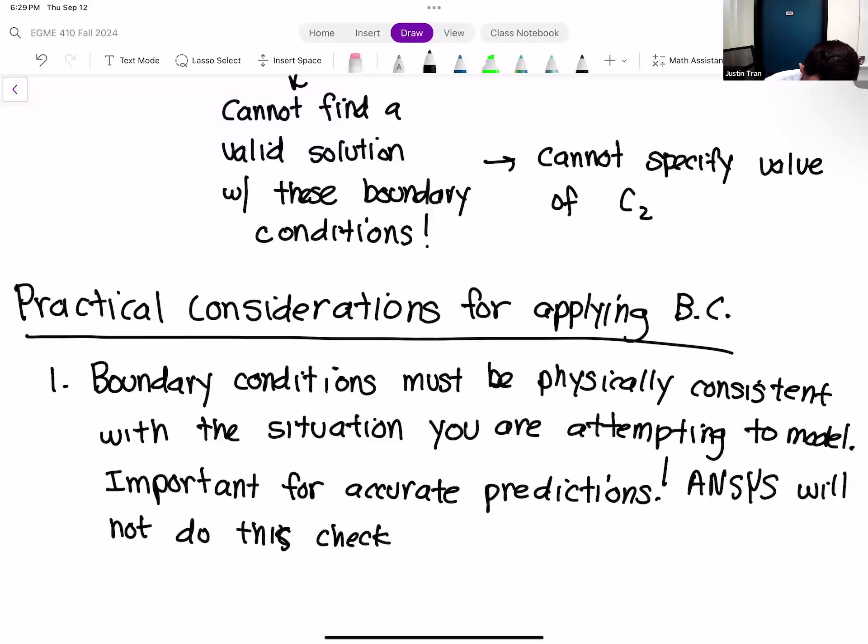If you apply the wrong boundary conditions - let's say you apply boundary conditions that are not physically consistent with your real life case - your simulation results are going to be completely wrong. And in the worst case, you're not going to know until you actually build the structure, and then it all kind of falls apart.

Based on my experience, the biggest source of human error in setting up an FEA simulation - and that's not only for this class, but what I see in general from people setting up simulations in industry to research people - the biggest source of human error is setting up the boundary conditions.

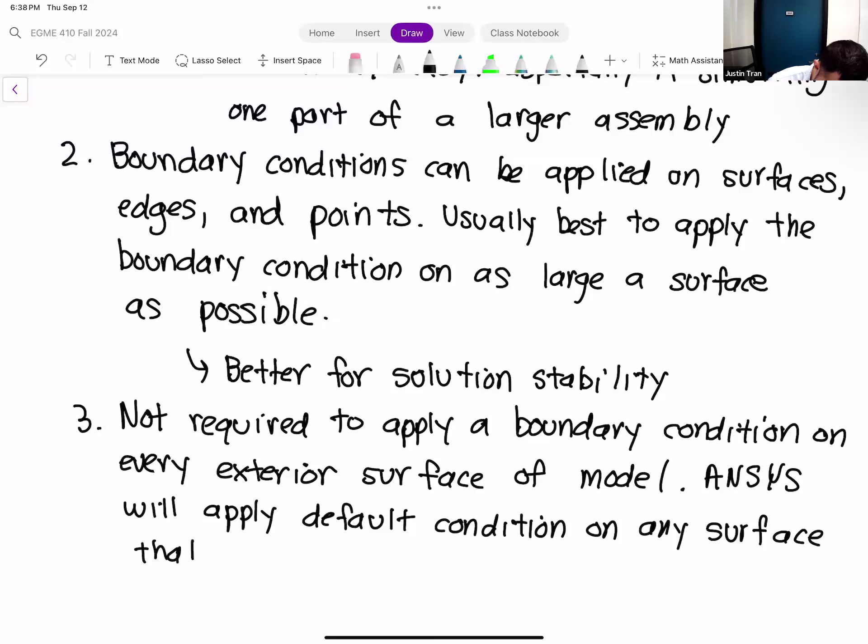What ANSYS does, and actually pretty much all finite element softwares do this as well, is that if you don't specify a boundary condition on a certain surface, it will apply a default condition on that surface. So by default, ANSYS applies a default condition, so you don't have to worry about applying a condition on every surface. What I usually tell people is that you should only apply a boundary condition on a surface if there's a non-trivial condition, such as a fixed support or an actual force.

If you're curious what the default condition is, it's not really a mystery, you can technically apply it yourself. The default condition is a zero stress boundary condition. In other words, from a structural point of view, a zero stress boundary condition means that surface is contacting air. Or, if you want to be technical, air is applying atmospheric pressure on the model at that point, but atmospheric pressure is applying it on every surface, so relatively speaking, there's zero stress, zero pressure.

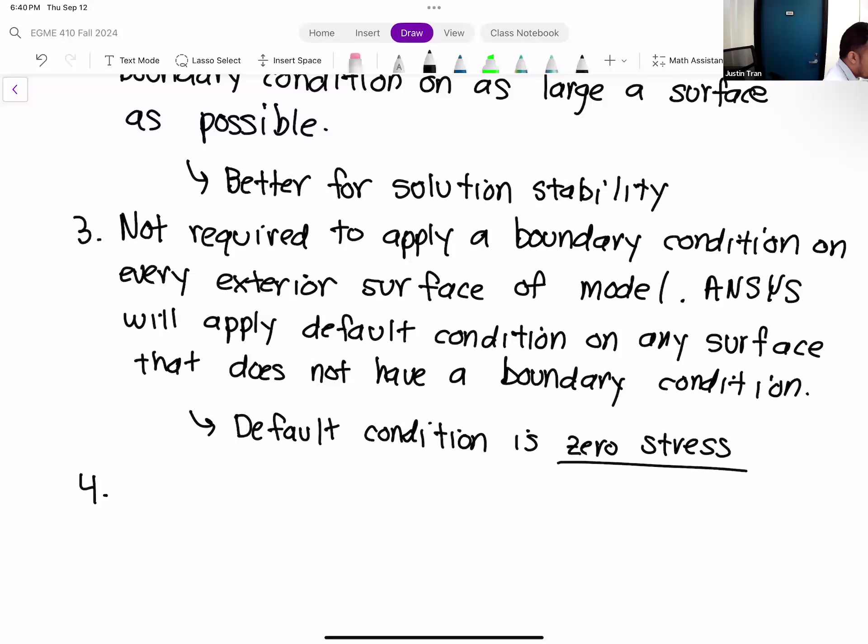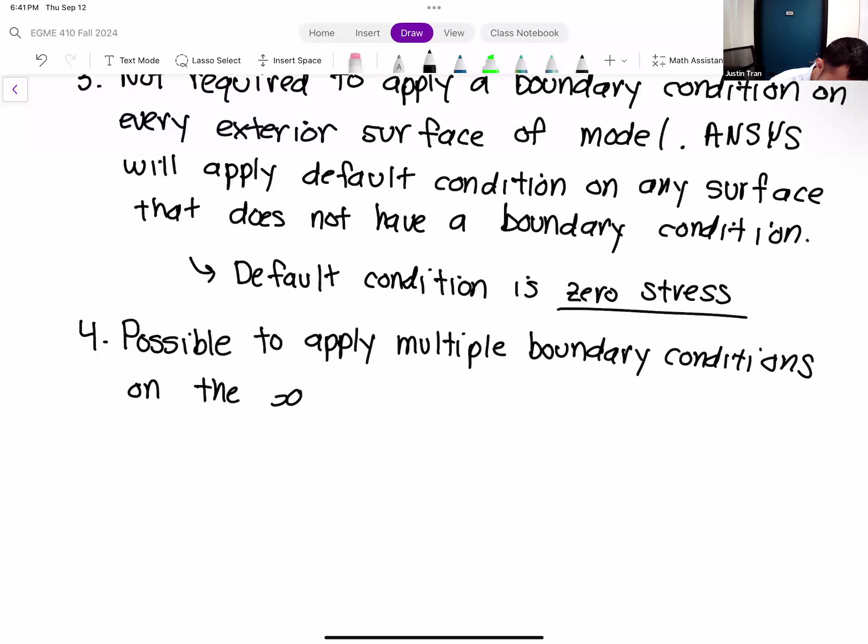Which makes sense, right? If I didn't mention anything at all, I think that's what most people would assume, that when you don't put a boundary condition on a certain surface. Okay, so the last tip: it is possible to apply multiple boundary conditions on the same surface. That is possible to do. For the most part, you're only going to be doing this in the case where you're applying multiple loads, and oftentimes it's because those loads are applied in different directions.

So I think we'll do something like that. I think it's activity 6, one of the last ones that we're going to do in this class. So we're going to see multiple loads. It doesn't make a lot of sense, but just know that you're not limited to just one boundary condition per surface.

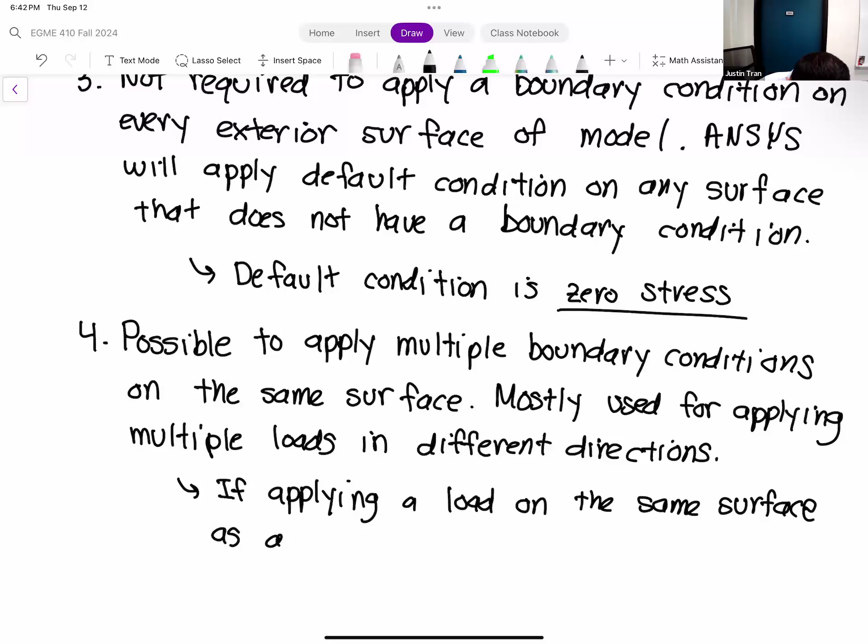But you want to be careful if you're applying a load on the same surface as a constraint. If you're applying a load on the same surface as a constraint, then the constraint is basically going to overwrite the load. So the load is going to have basically no effect.

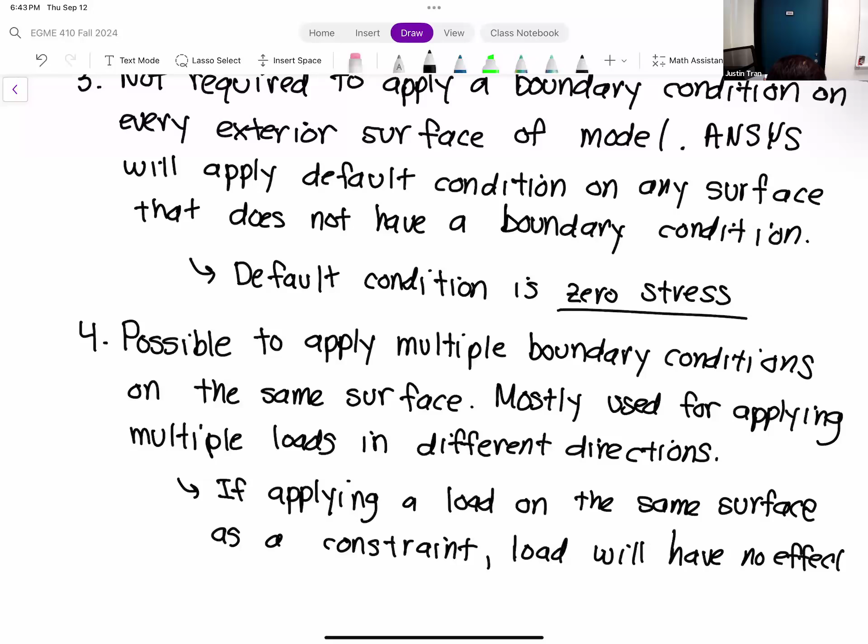Physically, it's very easy to demonstrate this. Let's look at our beam again. Let's say that we have a simply supported beam, so we have a fixed support or a pin support on the left-hand side, and on the right-hand side we have a roller. If you were to apply a tensile load on the right side of this beam...

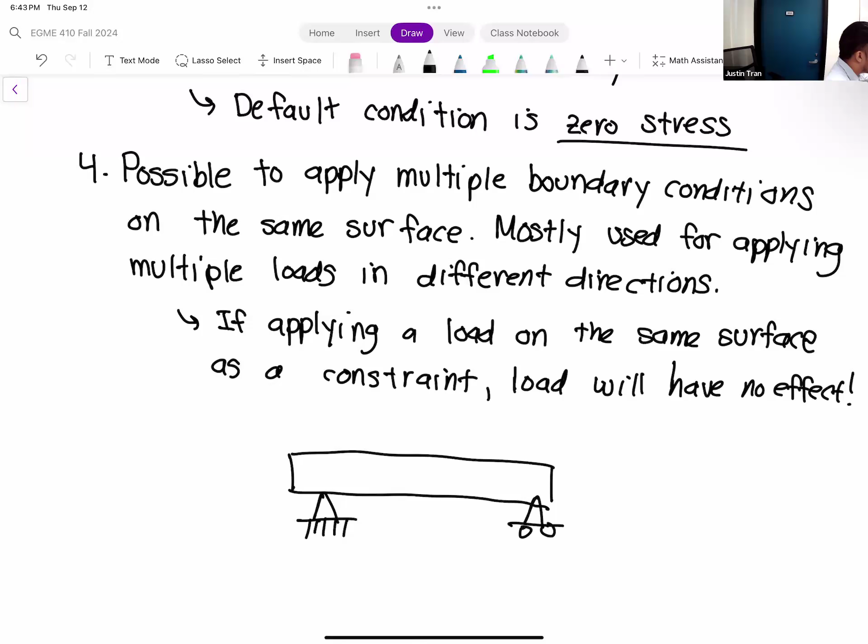You're going to get an interesting solution, right? Because you're able to pull the beam and the roller support's not going to impede that, and you're able to kind of stretch the beam out completely.

If you were to apply a load on the left-hand side, say a compressive load, this load is going to have no effect on the beam itself. You may see a little bit of overhang where the part of the beam that's not connected to the support might be compressed. But the fact that you have a fixed support right here, this fixed support acts like a wall, and the effect of that force is not going to extend past that wall. So the entire right side of the beam right here is going to be completely unaffected.

The same thing can happen in ANSYS as well. So if you apply a load at the same location as a constraint, then it'll basically be like that load isn't there. For the most part, if you're careful when thinking about your simulation, this doesn't really happen. But just know that ANSYS is also not going to stop you. If you apply a load at the same place as a constraint, ANSYS will just be like, cool, that does nothing. So just be aware.

It's more common to see this in cases where you have a lot of different loads, say a complex geometry with lots of loads going everywhere and you change things mid-simulation. So you just want to be careful that you don't end up in that situation.

All right, any final questions before we wrap it up for today? So, question: when it comes to ANSYS, the program itself—you know how CAD tells you if all sides are defined, right? Yeah.